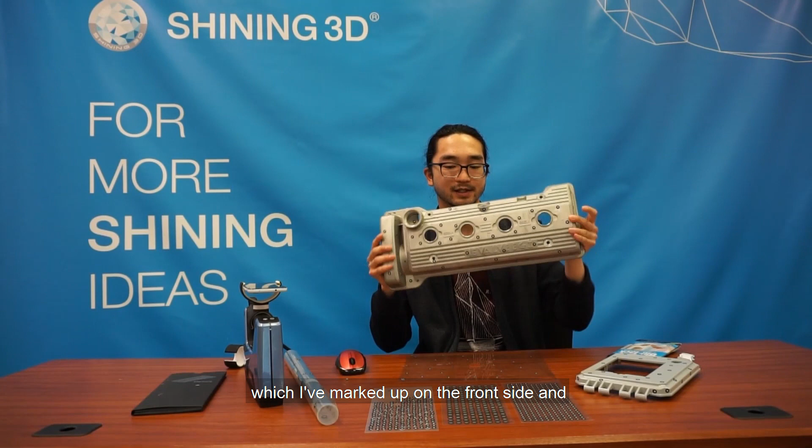Now, the object that we're going to be scanning today is this valve cover, which I've marked up on the front side and also on the other side. And we're first going to do a rapid scan so that we can just get the overall shape of this object and also get the positioning of the markers for this entire thing.

And then we'll be able to export a marker skeleton or a global marker file, which we can import into our fixed scan mode and then start scanning. And we'll be able to collect much higher resolution data in this mode. And the data will automatically align itself to the marker skeleton that we've made in the handheld rapid scan mode.

So this is a really useful way of using the rapid scan mode to first get an overall shape of the data and the marker positions, and then going into the fixed scan mode to get high quality data really quickly. So now let's go into the scan.

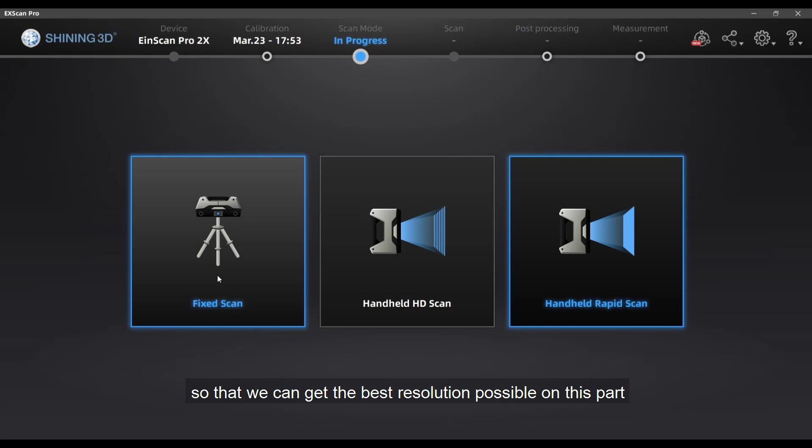So for this valve cover, we're going to use the handheld rapid scan to create a marker skeleton or global marker file in a medium resolution scan, and then we're going to use that global marker file in the fixed scan mode so that we can get the best resolution possible on this part. So let's go ahead and start the rapid scan.

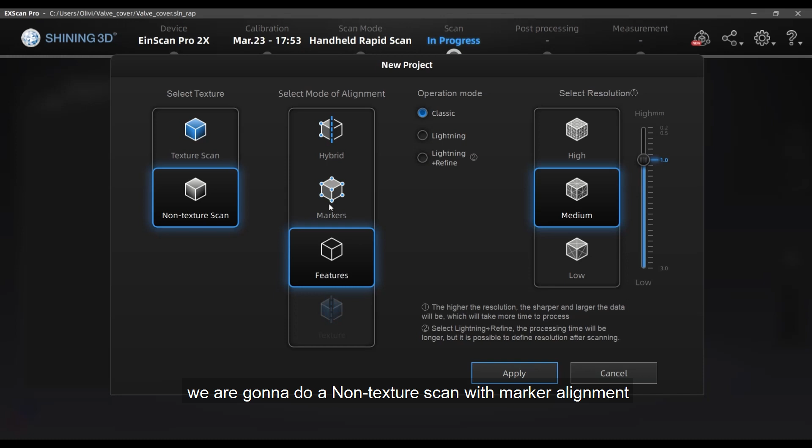First, we need to create a folder to hold the scan data in. I'll name mine valve cover. We're going to do a non-texture scan with marker alignment, operation mode classic, and in medium resolution. The resolution we decide for the scan won't really matter because we're not really going to use it, but a medium resolution scan would give you pretty clear features.

I'll hit apply and open up the scan preview page. Opening up the left camera here. So during the scan, we can focus on the markers and just get the overall skeleton of markers that are on this cover. And we're going to use that in our fixed scan mode. I'm scanning the cover while it's upright so that I can see both sides. I also placed a sheet of markers on the bottom to help me keep track near the bottom of the cover and the floor.

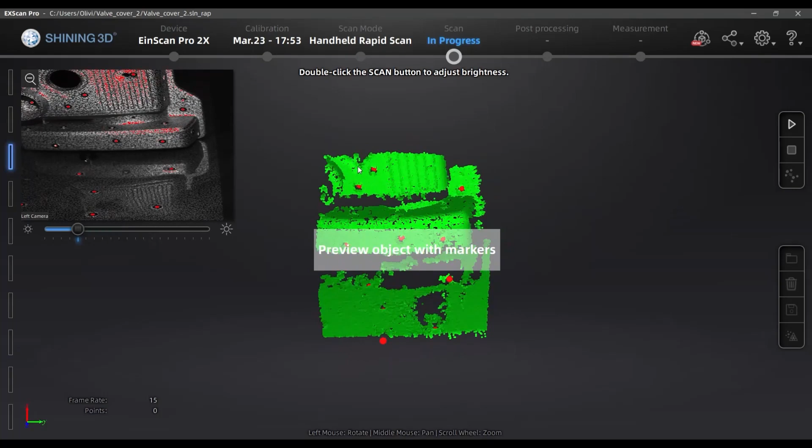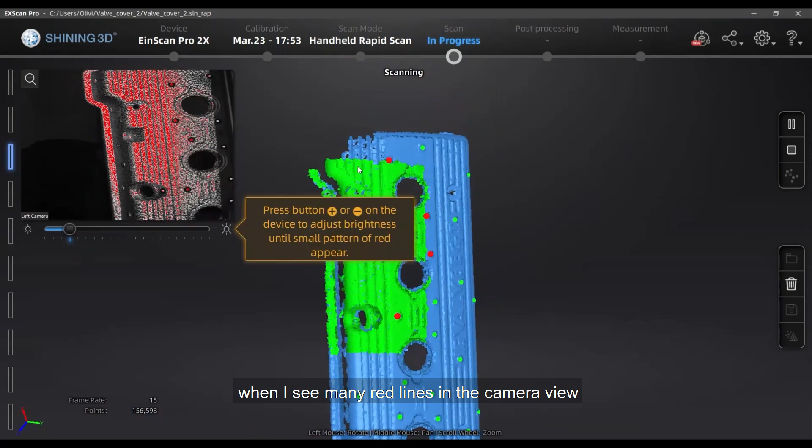Our goal is to get as many marker positions as we can for the P3 file. So I'm going to preview the scan first by finding a place where there's a lot of markers and then click again to begin the scan to start collecting all those marker positions. I'll be adjusting the brightness during this, such as turning down the brightness when I see many red lines in the camera view, and panning around the cover from different angles.

The good thing about having the marker sheets on the bottom is that when I want to scan the other side, I can just focus on the markers on the sheets, which will bring me to the opposite side.

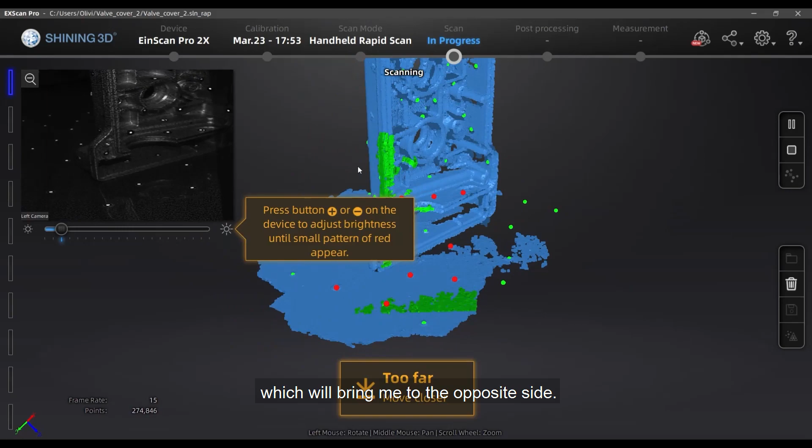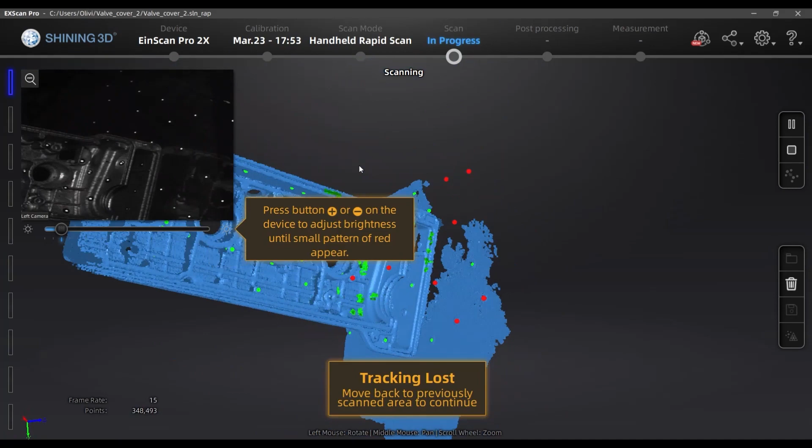One round of scanning, front and back, should have already captured a lot of markers that I can use in the next scan mode. Also, if I lose tracking during this, I can place the focus on the marker sheet where there's a ton of markers for the tracking algorithm, and then I can start again to finish the rest of the cover.

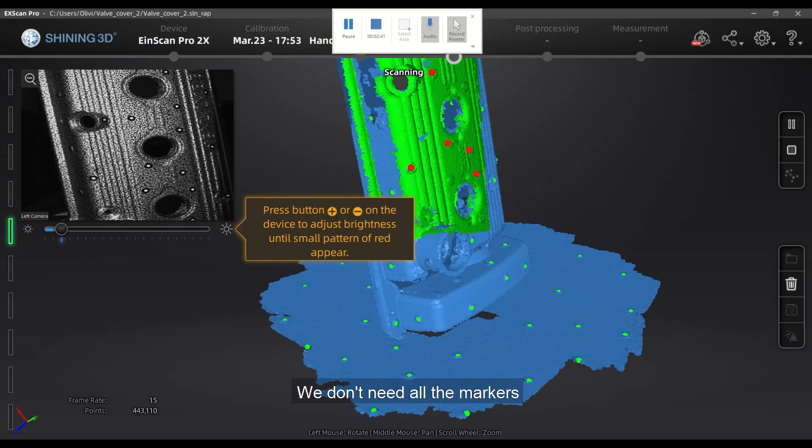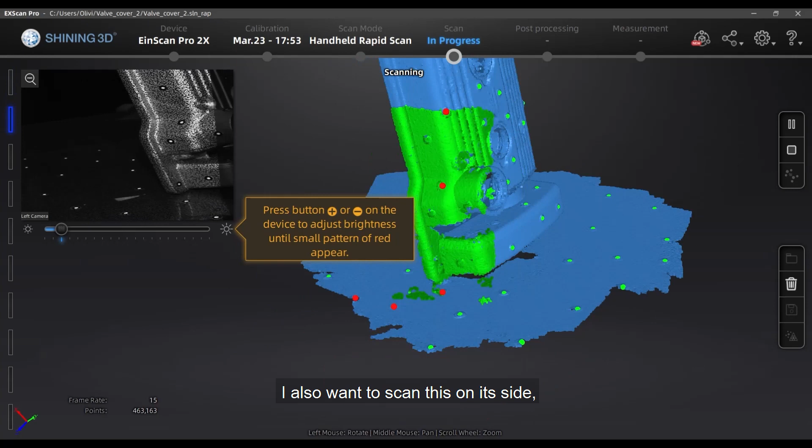We don't need all the markers because when we do the next scan, we may capture all the remaining missing markers. By having a good skeleton, we are making it easier to fill in this model in the fixed scan mode. I also want to scan this while it's on its side, and I'm going to put it on top of black cloth so the backgrounds won't appear.

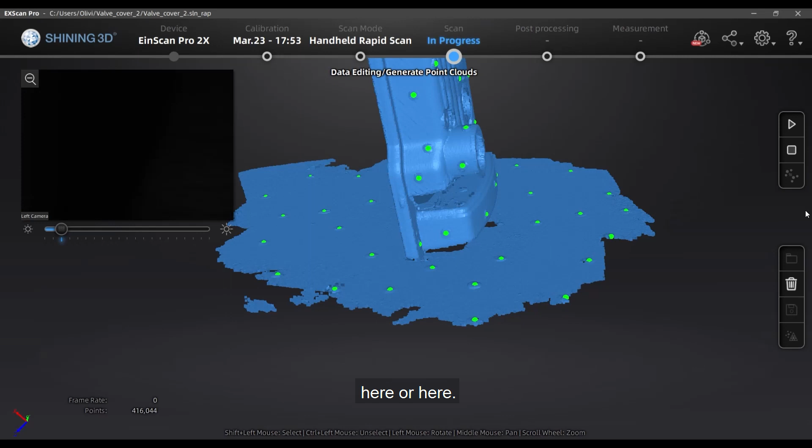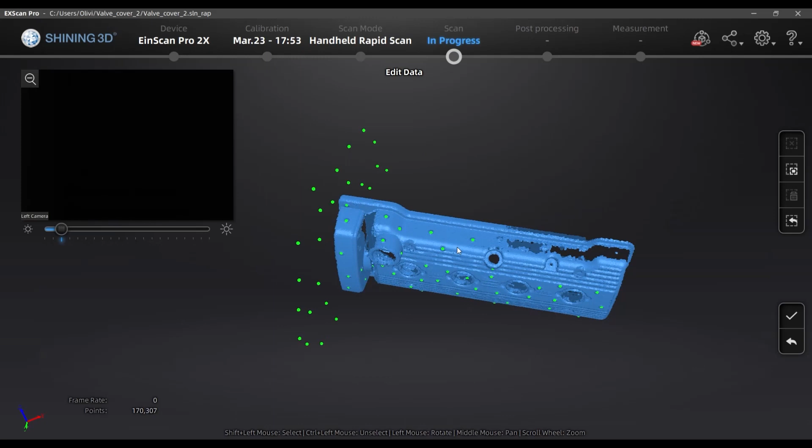You can use some of the selection tools listed on the bottom here. Shift left mouse to select and delete this data here or here. Middle mouse to pan, hold left to rotate. The markers on the floor work for a lot of scenarios if you are capturing the full skeleton of your model. Now I can scan both sides individually, even after repositioning the cover face down.

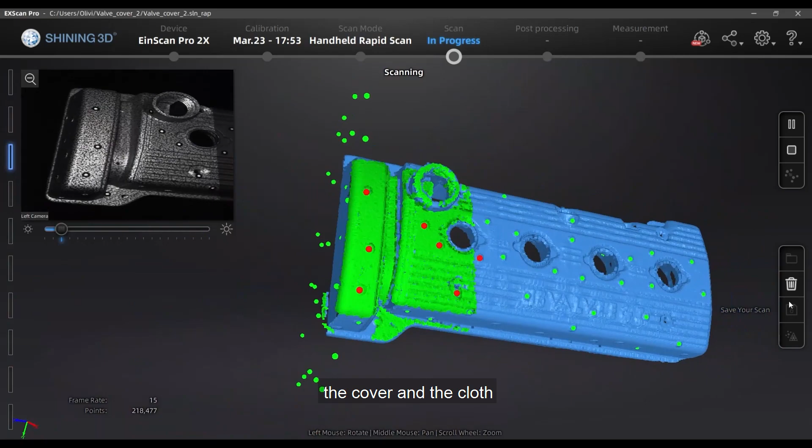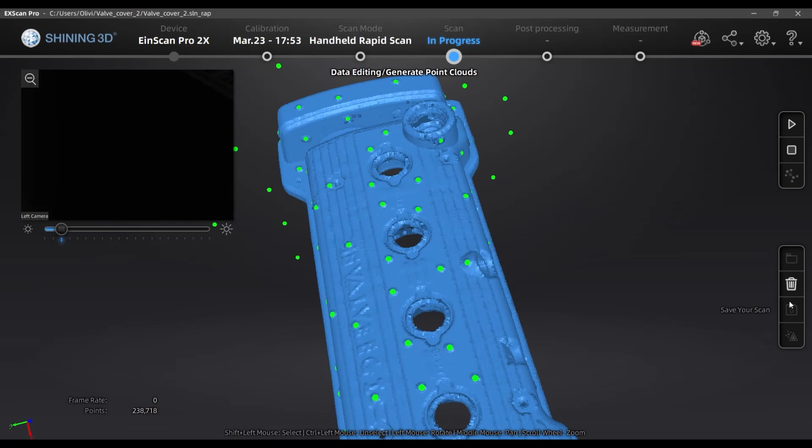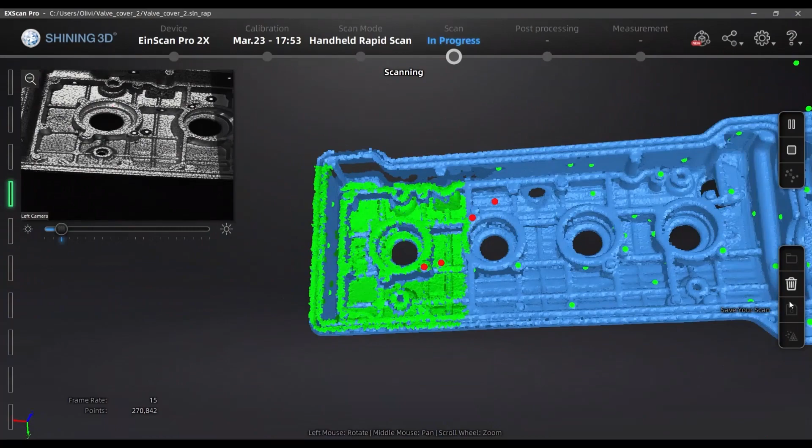The left camera view will show you the difference in exposure between the cover and the cloth and why you can't capture it. My goal for placing this face down is to try and scan a couple more markers. I'm also going to turn it around so I can get some more markers on the other side. And with this, I think we have all the markers we'll need to complete the scan in higher resolution.

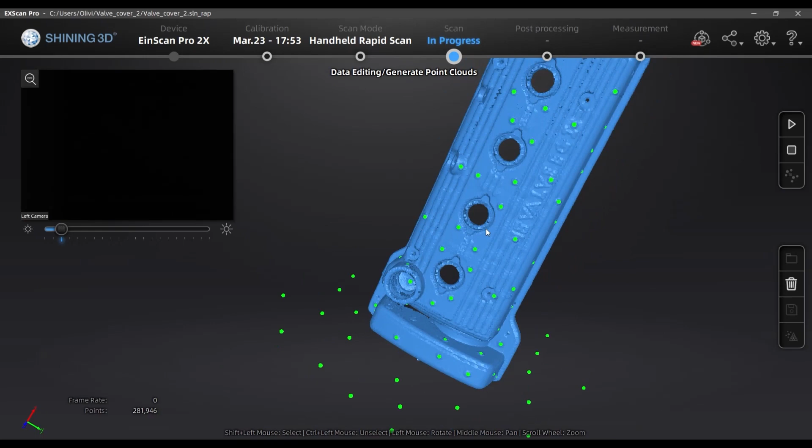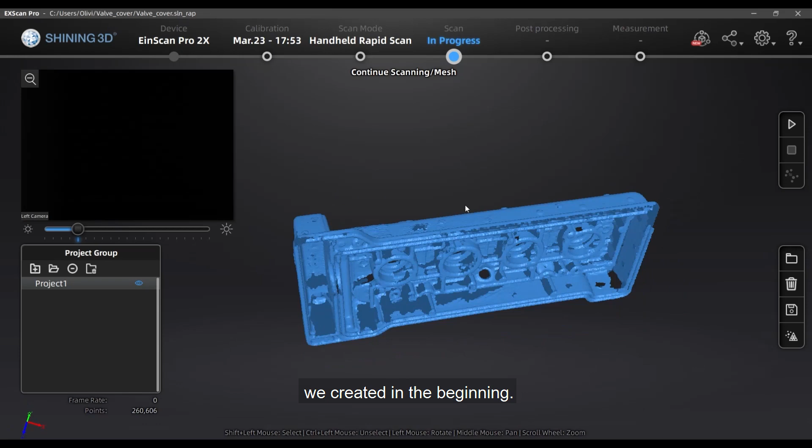We'll go here to generate the point clouds first, and then we can save out the P3 file. The data here is saved automatically in the project folder we created in the beginning. At this point, we can just save out the point cloud file ASC or the global marker file P3. I would recommend saving this in the same project folder as the rest of the data. Click confirm, hit this button, and we can move on to the fixed scan using the global marker setup.

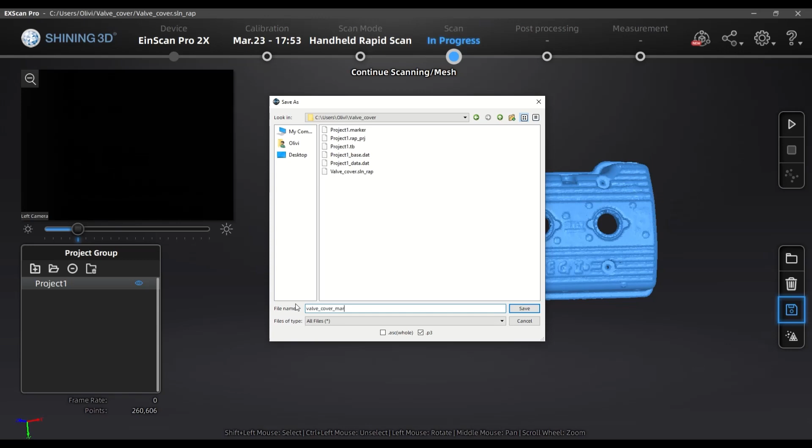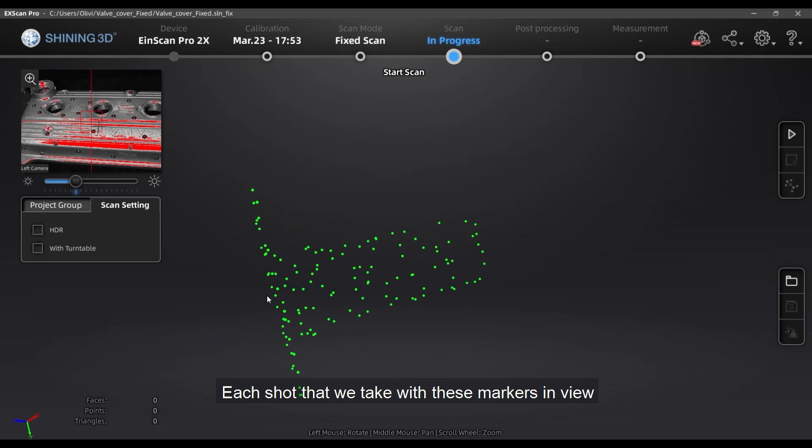Create a folder which can hold the data. Open up the global marker file when you get to this point. Hit apply and you should see the markers appear. Each shot that we take with these markers in view will align the data to the skeleton. In order to use the fixed mode setup, make sure that you have the scanner on a tripod. We won't need the turntable here because we'll be focusing on the markers.

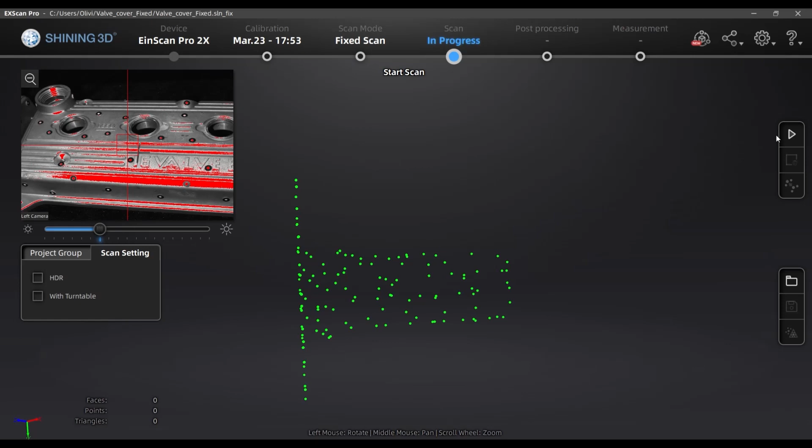You want to position the object so that the projector cross is close to this red cross that you see on the screen, and that will tell you that the object is in focus. Once it's close, hit the scan button. The scanner will take a single shot and give you the data and the marker positions. When you hit apply, this will align to the marker skeleton. One shot generated 700,000 points in a small area, so this is a really dense point cloud.

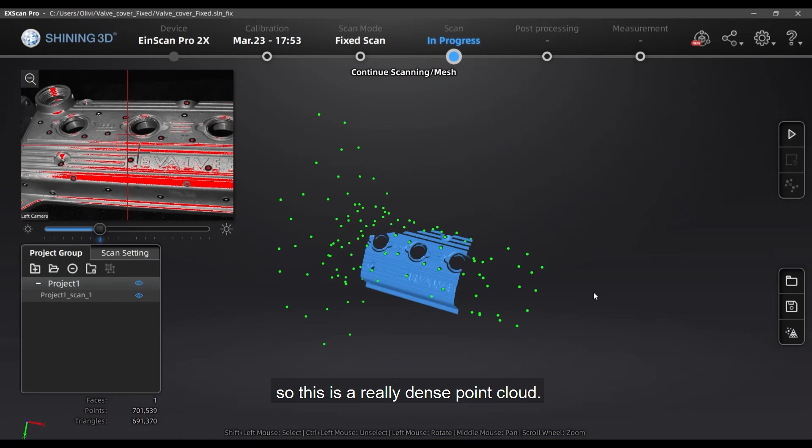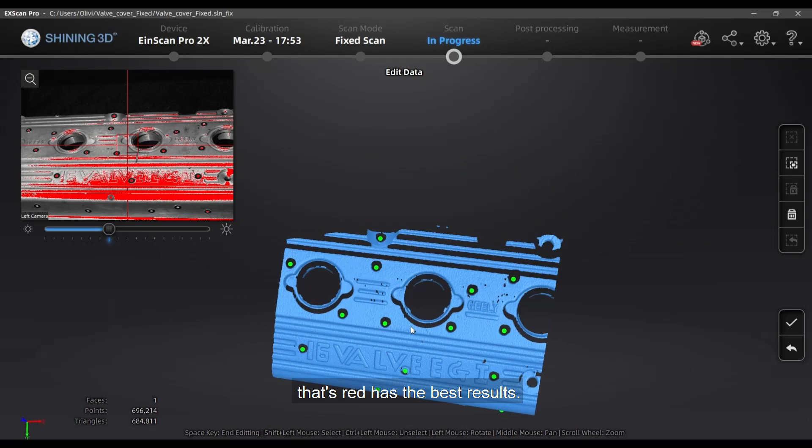We're going to keep taking single shots and move the object to change the focus. Make sure the brightness setting yields a good exposure. A couple of areas that are red, but not all over, typically has the best results. This valve cover is medium gray aluminum, so I think this would be a good exposure.

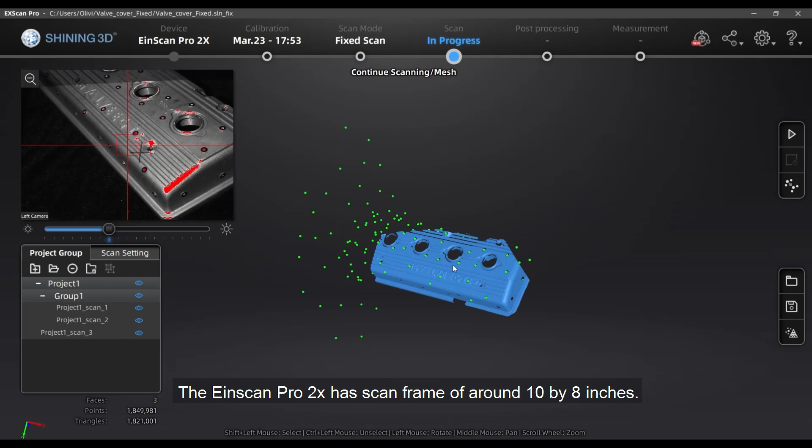A larger scan frame would also make this much easier and quicker, as it can take in more area. The Einscan Pro 2X has a scan frame of around 10 by 8 inches. The Einscan Pro HD has a scan frame of 12 by 10.5 inches. The Einscan HX has a scan frame of 15 by 16 inches. Each single shot that I take is giving me a lot of markers to merge to the skeleton, and that's why it's going so well.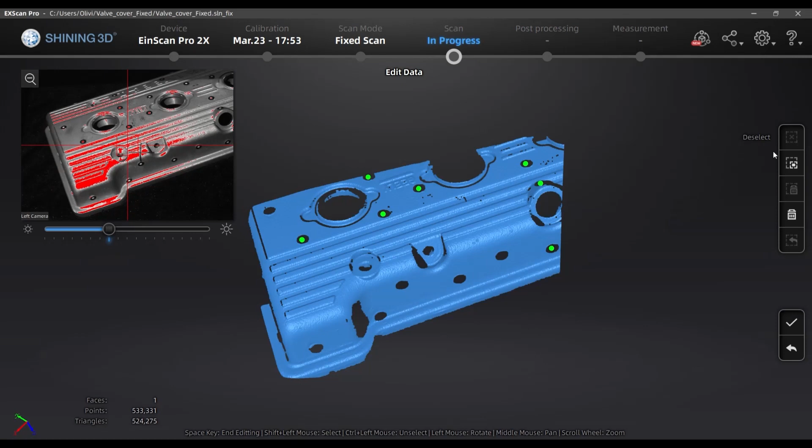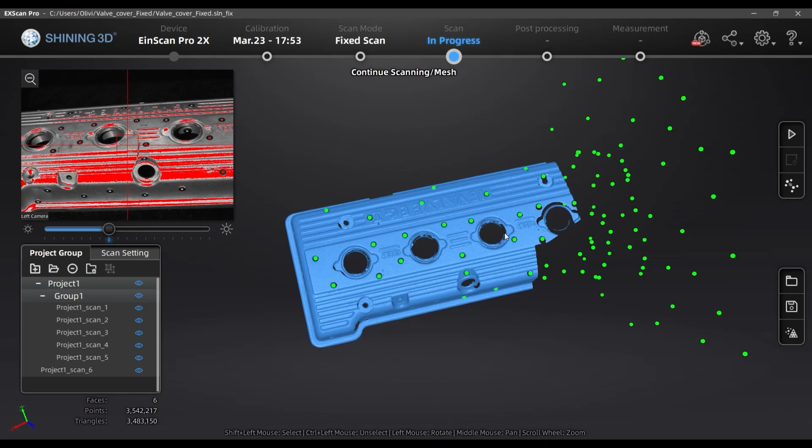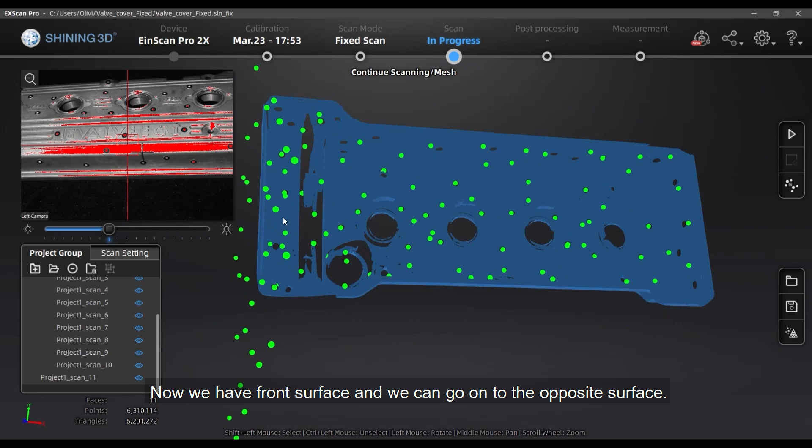There were some markers that we couldn't get before from the handheld Rapid scan, but I think that extra scan of the front and the back helped capture a good skeleton for us to fill in. Now we have the front surface, and we can go on to the opposite side. Let's turn up the brightness a little bit and move closer. We are going to continue the scan by repositioning the object and the scanner when necessary.

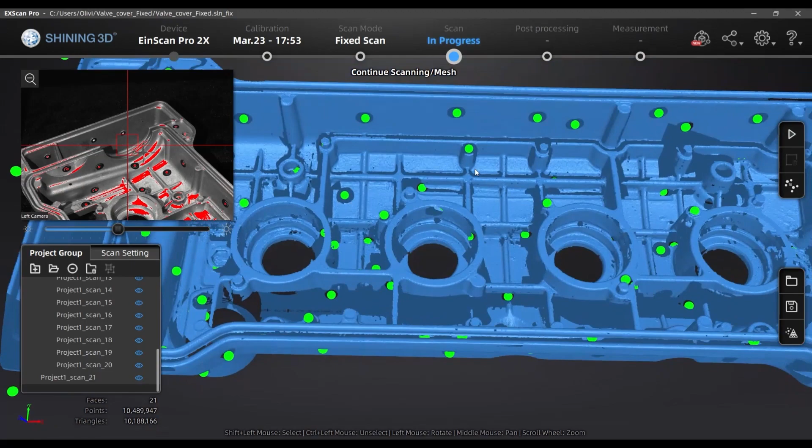And that's it. We have a valve cover scanned in medium resolution and one in high resolution. We're going to save these out for later. I also wanted to scan one of the parts that I showed you earlier, so that you have a good idea of how to align the top half of the scan with the bottom half scan. And we're going to be using the fixed scan mode for this.

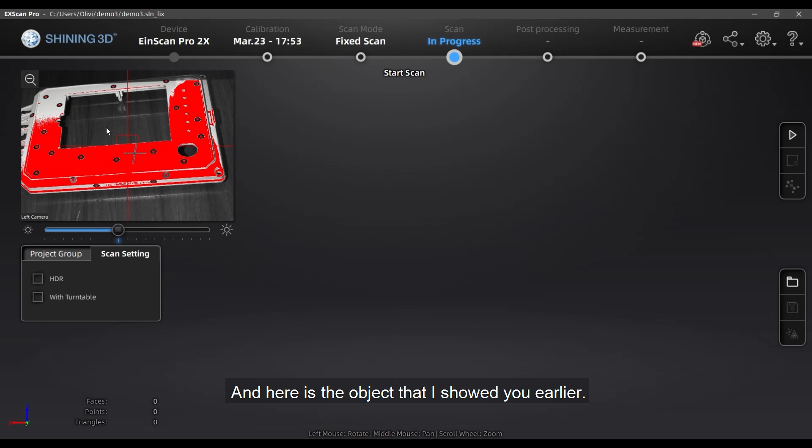So let's go and create a new folder to hold our data. And then select either texture scan or non-texture scan. For this, since I don't have the color camera, I'll go with non-texture. And here's the object that I showed you earlier. You can see I have a lot of markers on it. And it's also a little bit overexposed, so I'll bring down the brightness so that there's just a few red lines.

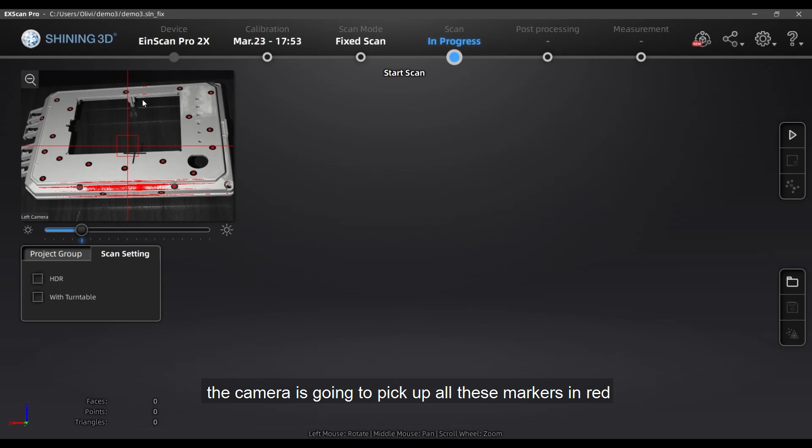And you can see that in this first scan, the camera is going to pick up all these markers in red. And that's really good because we want to have as many markers as we can in the first shot that we take, so that when we're rotating the objects, there are markers that it has already scanned and it can align the data to those areas. So I'll show you what I mean.

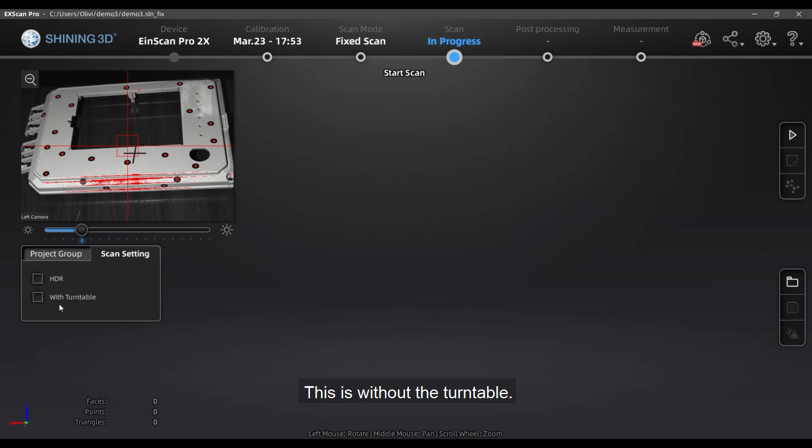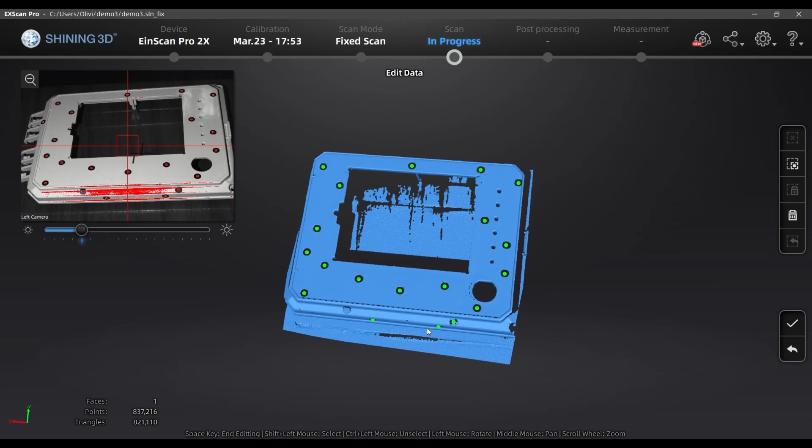This is without the turntable, so you can use the fixed scan mode without the turntable as long as you have markers on the objects to help with the alignment. And you can see that in the first shot, I got most of the data in this area, a lot of the markers, and I also got some of the table, which I'll delete from the scan. And I'll also place this on a black cloth so that I won't scan the table anymore.

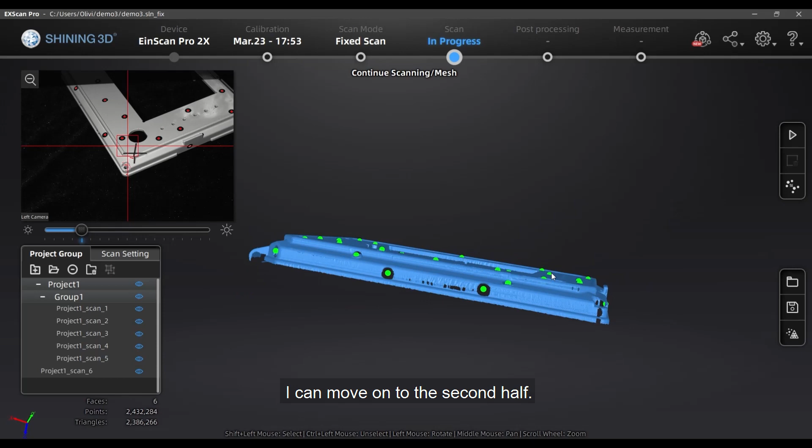Once I have the top half finished, we can move on to the second half. In order to align these two halves together, I placed a lot of markers on the edges here because this area will also be scanned when I flip it over. We'll be able to combine the two halves because there are around 3 to 4 of these markers on the edges to complete the alignment.

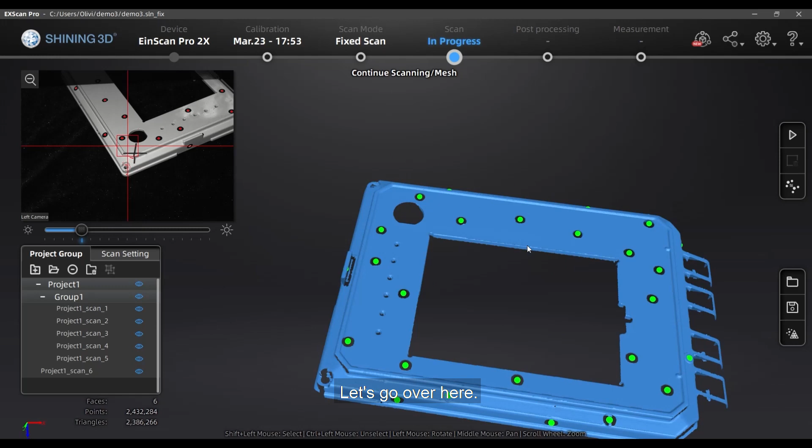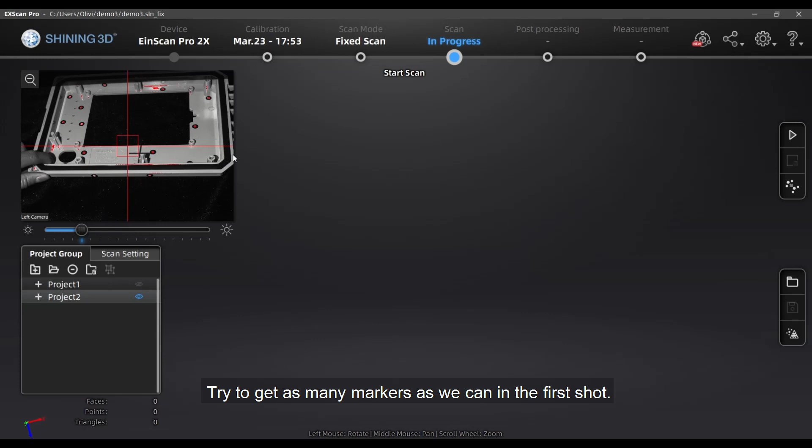If we go over to the left here, we can see that there's project 1, which we can toggle on and off. We can also create a new project, project number 2, which will hold the bottom surface. Let's try to get as many markers as we can in this first shot. So it looks like we got 2 here on the edges. Let's continue to fill in the missing area.

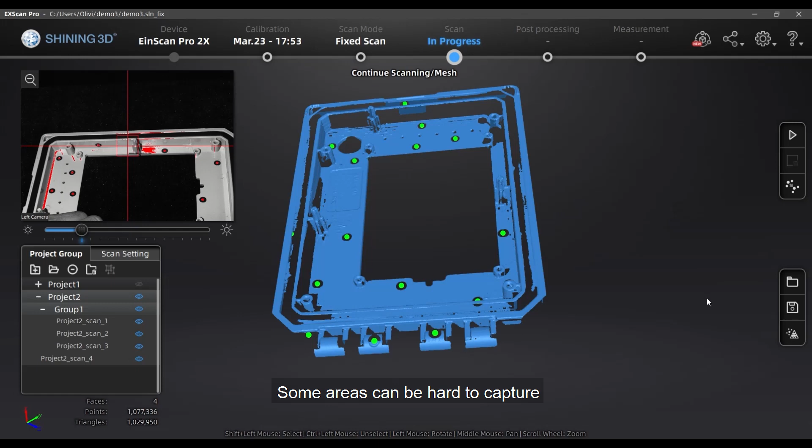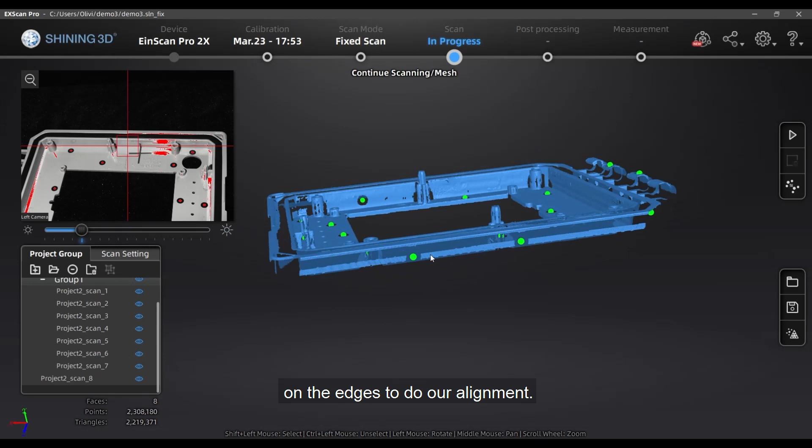Some areas can be hard to capture because shadows will cover it at many different angles. We'll just have to try our best at finding the right angle and rely on the hole filling method afterward to fill in any holes. Now let's see if we have enough markers on the edges to do our alignments. We have all 4 on the edges, so I think we're good. We should have enough data for the full model as well, so we're ready to align the data.

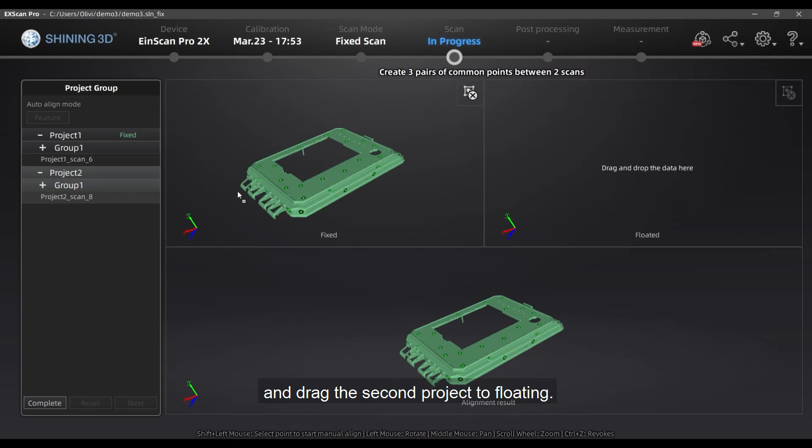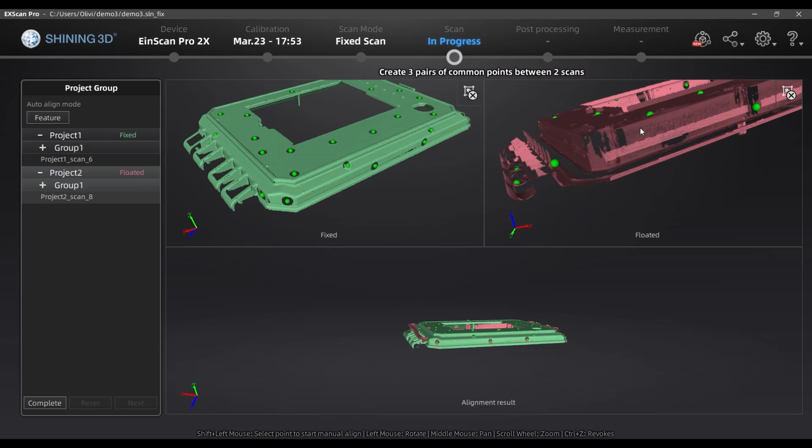We have 2 projects that are floating in space, so let's go to the Align tool here on the right. We'll drag the first project to fixed and drag the second project to floating. Reposition the cover with the pan and rotate so that both views, fixed and floating, are similar. Select the 3 markers on the edge. So these 2 here will correspond with these 2. And we'll pick the last one, which is over here in the front.

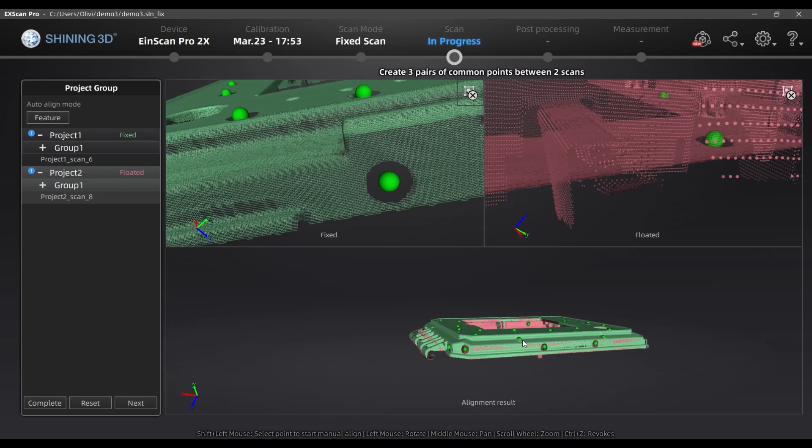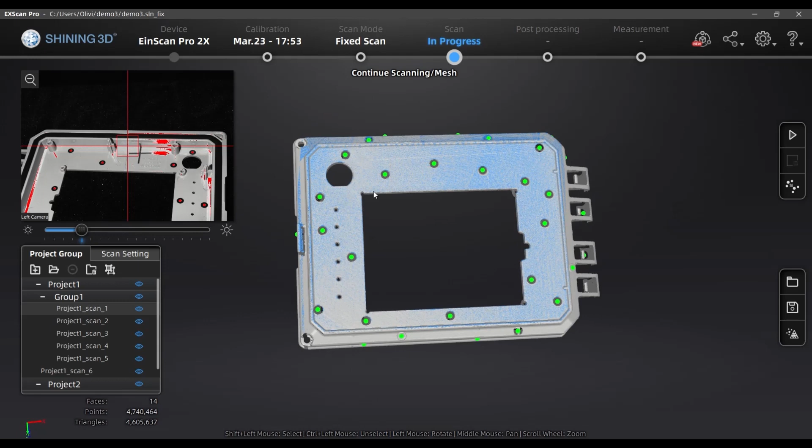And we did it! We've created a complete model. We can click Next and then Complete, and you can see now that those 2 scans have merged together where the markers are. We can also continue the scan at this point. If I hit the scan button now to start, it will collect more data, and as long as there are 3 or 4 similar markers here to the scan, it will align to it, or at least it will align to the project 2 folder we created here.

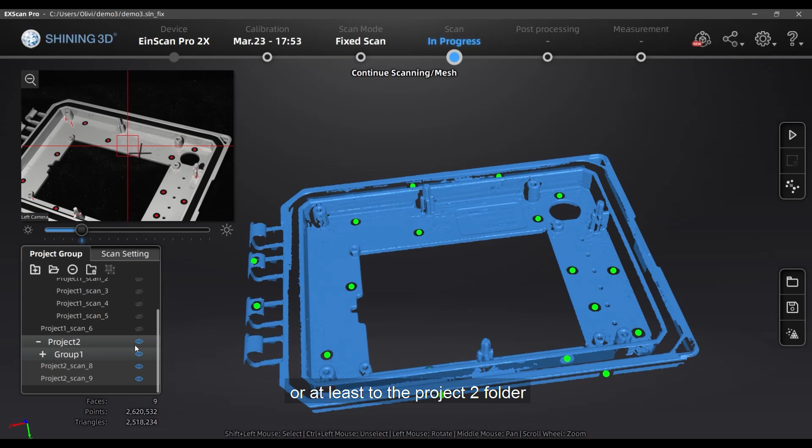Next, we can create the mesh model and export the STL. In the next video, we're going to talk about how we can use marker sheets to scan large flat surfaces, for example, on a car door or on another flat surface like the floor or the wall.